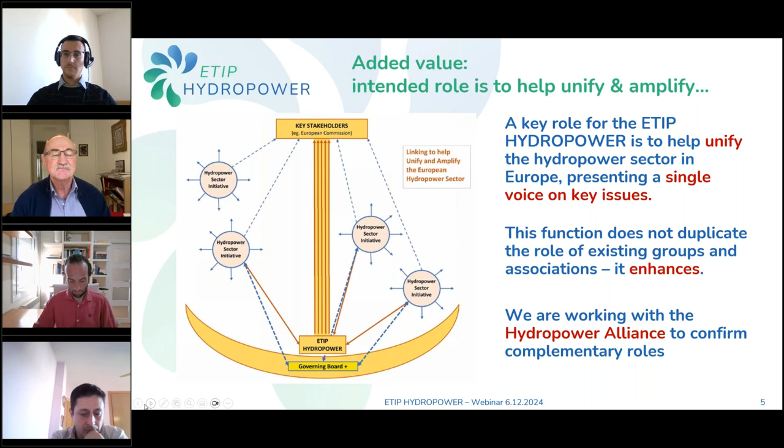Hydropower in action: we have an operational structure in place, a secretariat, and an industry-driven governance with all stakeholders from all sectors. We have a widely open scientific advisory board with 26 members. You see here the persons involved. I'm the scientific coordinator of Hydropower, and then we have the governing board chair Dennis Albrecht, and co-chairs Antonella Frigerio and Peter Stettner.

What we have done, important for those working on research projects, is establish a HERI platform which gathers all research projects ongoing in Europe, not only at the European Commission level but also what is going on in different European countries.

We have also established 4 working groups, active since early this summer: Hydropower's role for flexibility and storage, Hydropower and biodiversity, Hydropower and climate change, and a cross-cutting working group on promotion, dissemination and uptake of past and current European research and innovation projects, which organizes these webinars. These working groups will publish first results during our Hydropower Day, on 8th of April next year in Brussels.

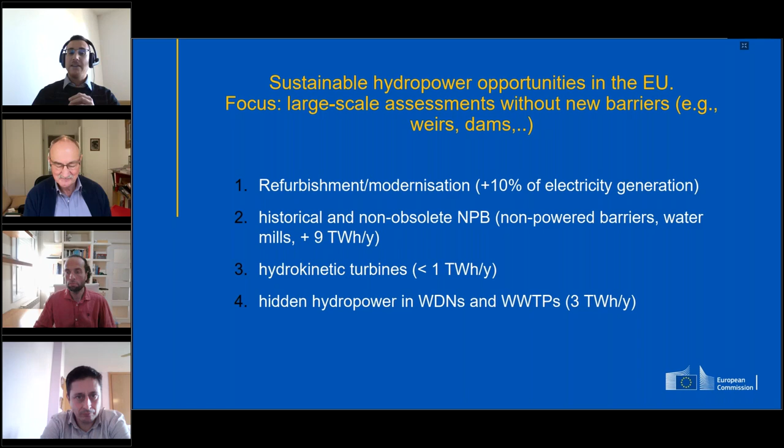Another important activity we have finished is the quantification of energy storage in hydropower reservoirs and in pump storage hydropower.

We found that in literature there are several sources of data, and often these sources provide different data. Sometimes this data on energy storage is not well defined. It's difficult to understand, for example, if they include the cascade effect or not, or if they are talking about a theoretical energy storage capacity or a technical economic one.

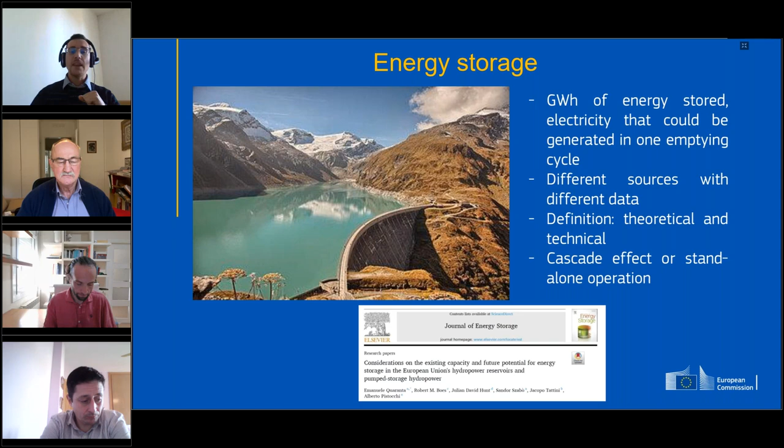So we tried to bring some order to this, and published this a few days ago in this paper. Here's a summary of our results. We provided data and calculations both for pump storage hydropower and for traditional reservoir hydropower, calculating a sort of theoretical energy storage, which is practically the head multiplied by the volume of the reservoirs.

Obviously, the smaller reservoir limits the potential. Then we corrected this theoretical energy storage potential, calculating a technical energy storage potential, considering some reduction coefficients, for example the efficiency, or the fact that not all the volume can be used for safety reasons.

And we have compared this number with the reported energy storage capacity found in literature. We found that there is agreement, but also some differences, and these differences are well discussed in the paper. Now I will not go into the details, otherwise I will need hours, but you are encouraged to read the paper and provide your feedback and constructive criticism.

It is important also to show this data because by comparing this number with the numbers provided by other studies that show the future potential, it is possible to understand really how much the future potential is. This is shown in these slides.

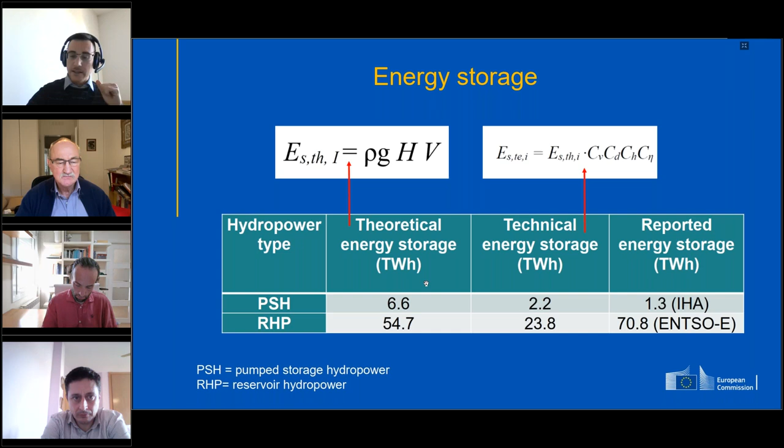You can see that the opportunities are a lot. The available potential that can be exploited, the sum of all these strategies, is much larger than what we have. So technically speaking, in the European Union, there is still potential for new pump storage hydropower.

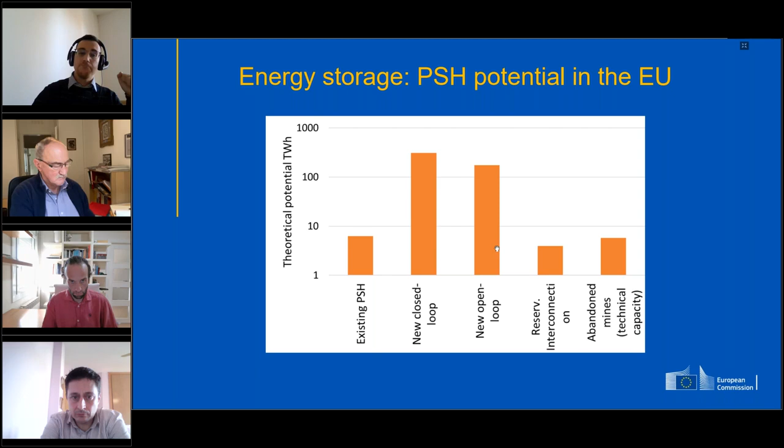For example, from new closed loop pump storage or from new open loop, but also by interconnecting reservoirs or by using abandoned mines. The problem is that most of this potential currently is not economic because of market limitations, but there is a potential.

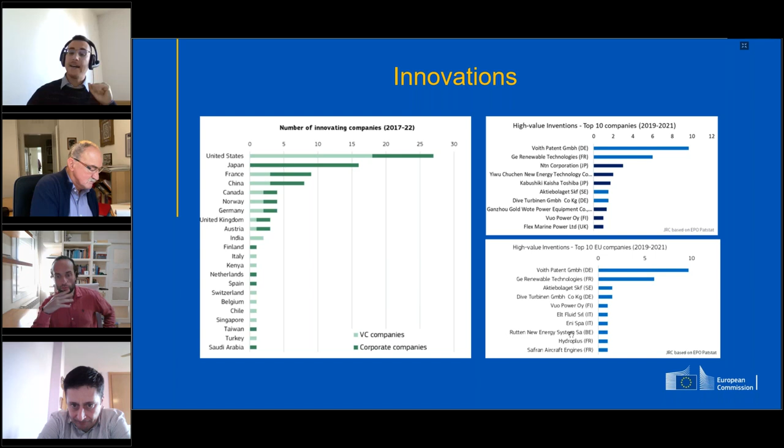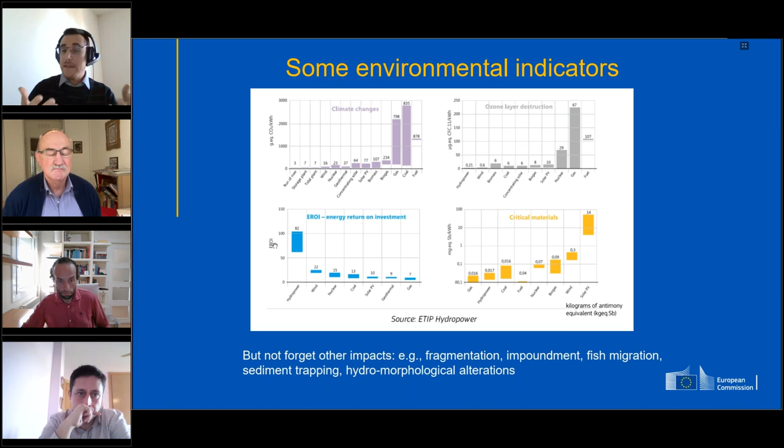If we look, for example, at the greenhouse gas emissions per kilowatt hour, or at the chlorofluorocarbon emissions, or at the energy return on investment, and so on, we can see that hydropower has the best indicators. However, we must not forget that there are also impacts associated with hydropower that are not captured by this picture, like, for example, sedimentation, fish migration, and so on. So it is very important to implement mitigation measures.

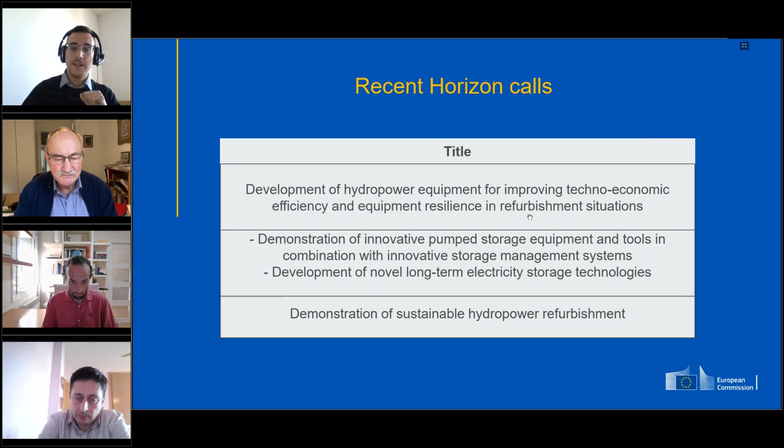Also another call on demonstration for sustainable hydropower refurbishment. So now I come to the core of this webinar, the presentation of these 3 new funded Horizon projects: RevHydro on revolutionary refurbishment for efficient and eco-friendly hydropower, Sherpa on a new solution for hydropower plants to enhance operational range performance and improve environmental impact, and StorHy, innovative storage technology and operation in hydropower. As you can see, the topics of these projects align well with all the discussion and data I showed you about the European Union.

So innovation, energy storage, and also reduction of environmental impact. Here are the references: the first is the annual report that was published a few days ago, and the second is the paper on energy storage. Maybe I can also write it in the chat. So thank you very much. Now I give the floor to Anton, who will present the next speaker. Thank you.

Thank you very much, Emanuele, for this very interesting presentation on the potential and strength of hydropower in Europe, which has been proven by the studies you have done. So we are pleased to come to the presentation of the first project, which will be done by Ademir Suarez. Ademir Suarez is currently head of the electromechanical engineering team of the hydropower generation division of Iberdrola in Spain. Please, Ademir.

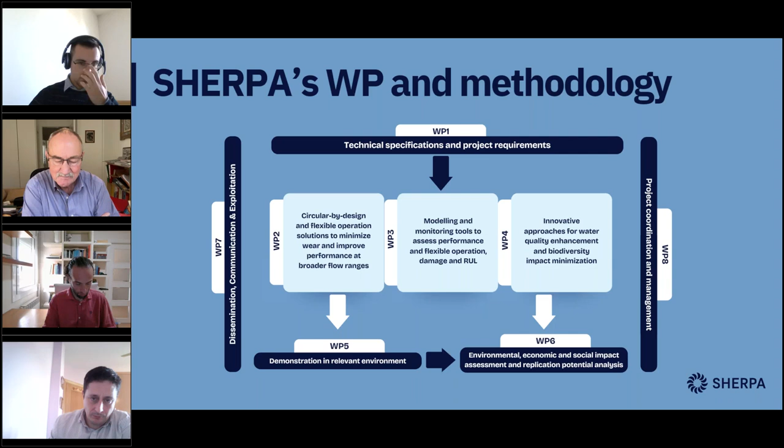Now we are going through some of the pilot plants. Iberdrola Hydropower, as operator of almost 12,000 megawatts in Spain and Portugal, is going to use our own stations. We have selected some stations with real needs from the Mediterranean basin and the Sil basin, and maybe some others that are now under assessment. I would like to show some of them with some nice pictures of these stations.

For this station, we are looking at the main objectives of this topic: operating the units in really deep part-load without any significant troubles. For some of them, we are going to assess changing to new hydraulics or applying additive manufacturing.

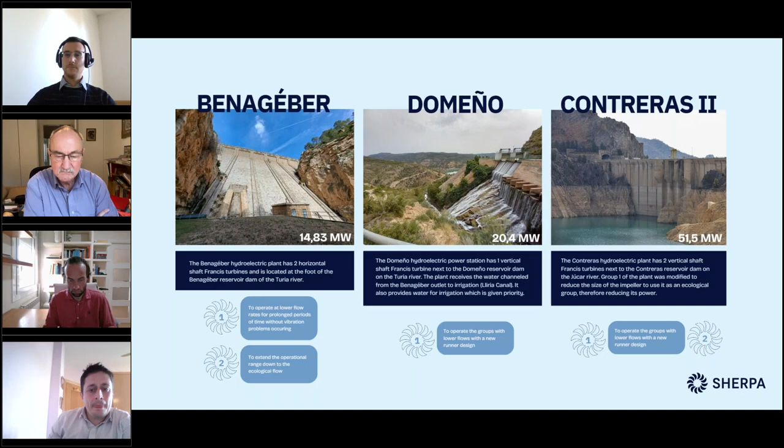More places - we are now in the first working package; we are at the stage of defining the requirements and discussing with all the partners of the consortium to know where it makes sense to apply each objective. So we are going to go through all of them, making a comprehensive and full assessment, and afterwards putting the efforts into all or at least some of them.

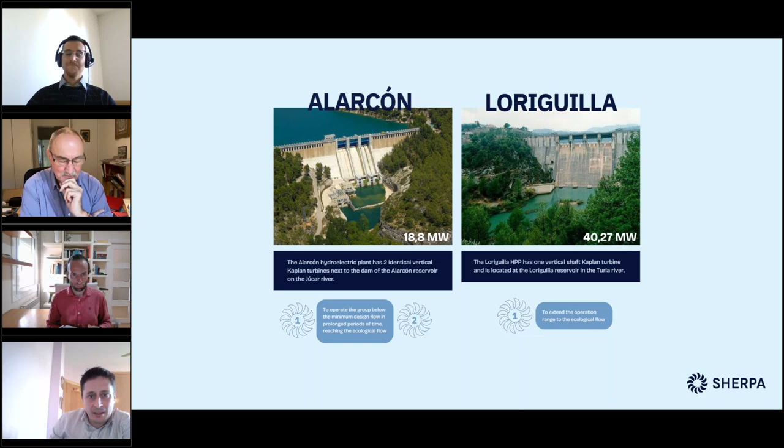Moving quickly to the Sil basin, here are some stations, and I would like to point out that some needs don't always come from all the stations. Here we have, for instance, Alto Támega, one of the newest stations from Iberdrola, commissioned almost this or last year. This station is used to launch reversible units from Gouvães.

And for instance, Daivões also is a new station, has 3 units. The 2 main units are big ones, and we have a third for the ecological flow. But here, for instance, it will be really interesting to deal with the deep part load of one of the main units, to cover the distance between the rated output of the small one for the ecological flow till the big units.

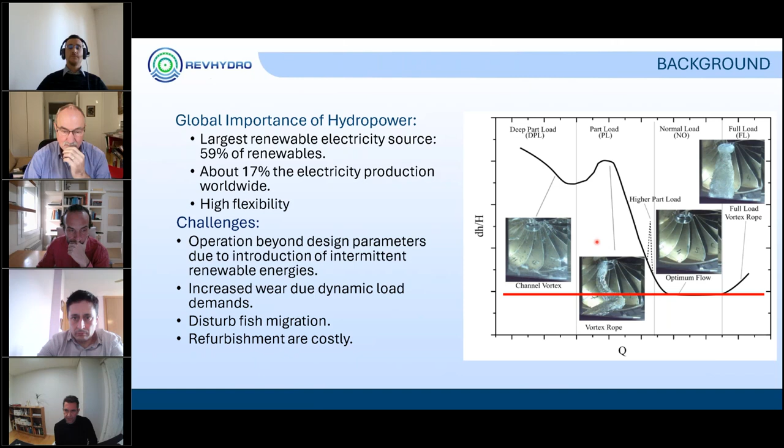So in order to achieve this type of goal, we have three specific objectives in the project: the development of some flow control technology, some fish barrier technology, and some circular economy approach.

In terms of flow control technology, we have two technologies which will be developed. The first one is in the draft tube, which consists of some guide vanes that can be radially adjusted to mitigate the pressure pulsation at part load operation due to the rotating vortex rope, and which also have some variable porosity.

The second flow control technology consists of a smart add-on, which will be installed on the runner in order to decrease the interblade vortices and the fatigue. There is already some work done in this area, but what's going to be presented is quite new.

In terms of fish barrier technology, a fish barrier will be developed—it will not be this one. The fish barrier technology which will be developed will consist of a bubble curtain, an acoustic source, and a strobe light source. These three components will be adjusted depending on the fish species, the maturity of the fish, and the environmental conditions, so we will have an adaptive system.

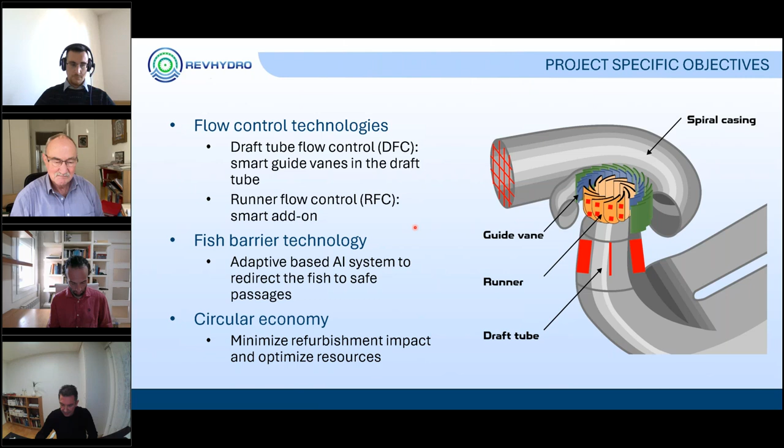In terms of circular economy, we aim to minimize the refurbishment impact and optimize the resources. To this aim, we will develop a generic methodology to study and optimize refurbishment procedures. We will perform life cycle analysis, life cycle inventory, and life cycle costing studies, and a systematic approach for maintaining and extending the lifespan of critical hydropower equipment will also be developed.

So if we look at the structure of the project, we have 6 work packages. We have the standard work package for management, and WP5 for communication, dissemination, and exploitation. Related to the specific objectives, we have one work package dealing with the development of the runner flow control, where we will have experimental investigation and numerical simulation with focus on deep part load operation.

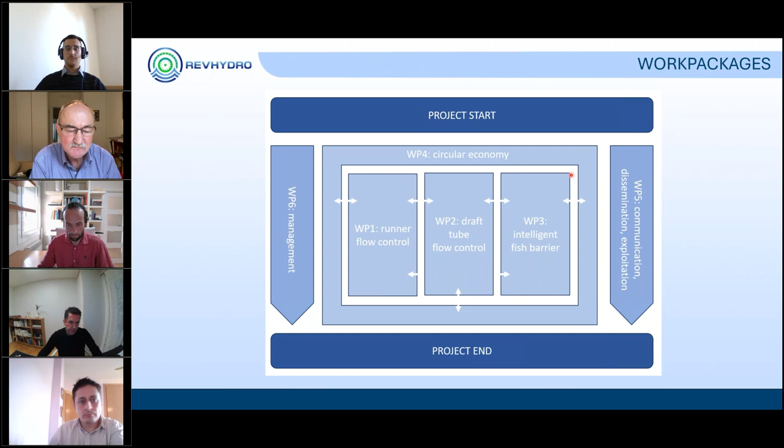While in WP2, it will be the development of the draft tube flow control, with experimental investigation on model scale and numerical simulation to develop the flow control device with focus on part load operation. In WP3, the intelligent fish barrier, or iFish, will be developed, with extensive experimental investigation using some living fish.

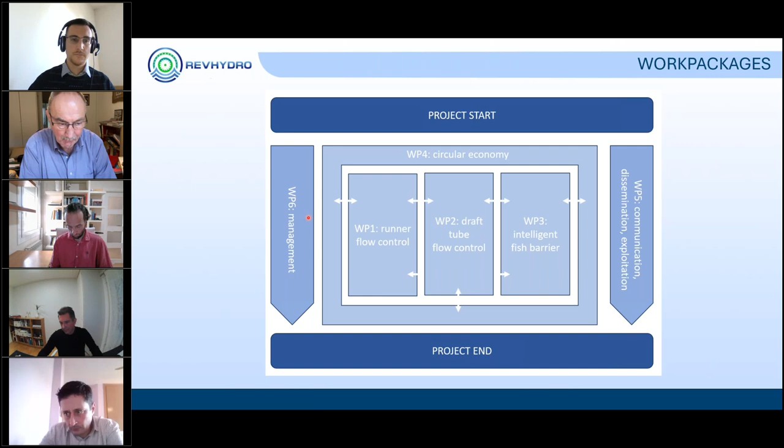Finally, we have work package 4, related to circular economy, which will be led by RSIM. WP1 will be led by General Electric, WP2 by Luleå University of Technology, WP3 by ICPE, WP5 also by RSIM, and WP6 management is LTU, which is coordinating the project. In terms of workforce, we have a total of 430 person months.

The extension of the operating range of Francis turbines and efficiency is a quite important topic in the project, because WP1 dealing with runner flow control stands for 30%, and WP2 dealing with draft tube flow control also stands for nearly 30%. Together, extension of operating range and efficiency stand for about 60% of the workforce. Development of the iFish stands for about 15%, circular economy a little less than 10%, and WP5 and WP6, dealing with dissemination and management, stand for a little less than 20%.

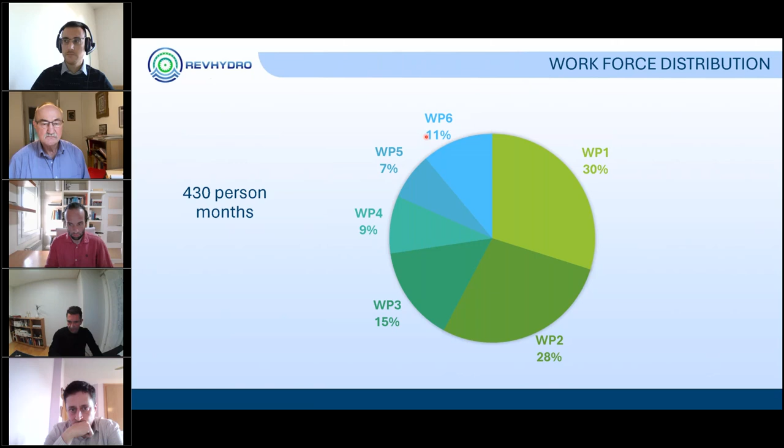In order to track the progress of the project and align all the partners, specific key performance indicators have been developed. For WP1 and WP2, we expect to predict the pressure fluctuation and strain from the numerical model within plus minus 20% of the experimental results. We also expect to predict fatigue within plus minus 20% of the experimental measurement. This modeling is quite important to develop the runner flow control device and draft tube flow control device, also for optimization purposes.

In terms of efficiency and resilience, we aim to expand the operating range by 50% with a flow control device that will be developed, and decrease fatigue by 80% at part load and deep part load operation. This will allow us to extend the turbine life by 25%. Quite important also is to allow an increase by one order of magnitude of the starts and stops without additional fatigue.

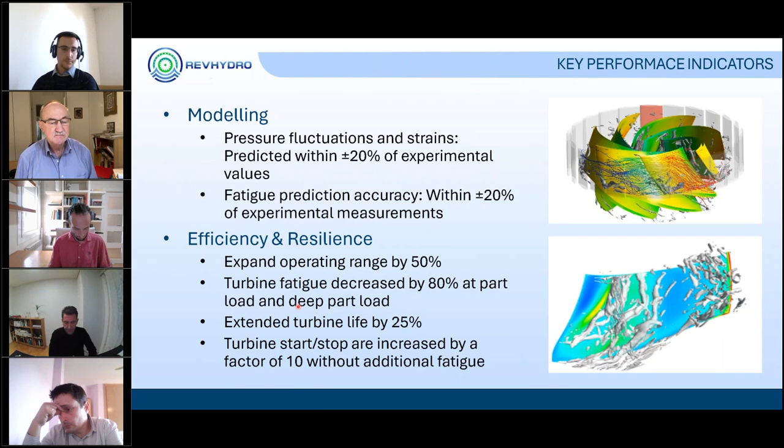In terms of key performance indicators for environmental impact, we have some ambitious KPIs. We expect to be able to redirect 95% of the fish from the turbine intake with the iFish system. In terms of circular economy, for refurbishment, we aim to decrease carbon dioxide emissions by 30%, reduce resource consumption by 25%, reduce operating expenses by 20%, and CapEx by 50%.

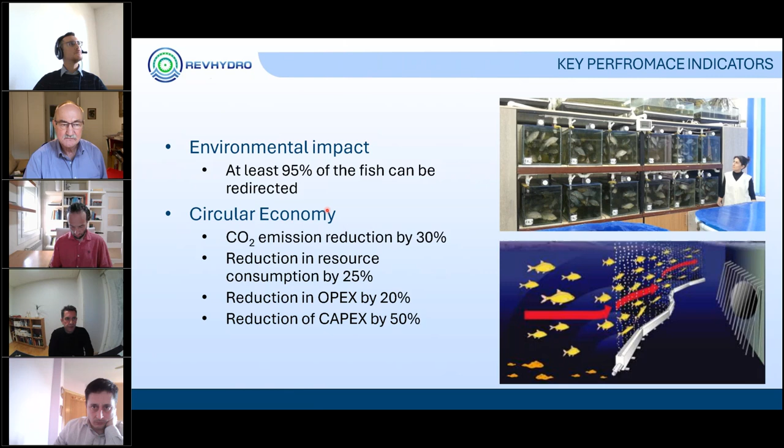So expected impact: we expect to increase energy efficiency. By reducing harmful off-design operation, the refurbishment will improve energy production efficiency by up to 10% in certain operating conditions. I think this number is quite conservative if the flow control devices work as we're expecting. We will extend the operational range and lifespan of the turbine, so the refurbishment will expand the operational range of turbines by 50% and increase lifespan by 25%, reducing the frequency and cost of overhauls.

As mentioned, we will also enhance biodiversity protection with the iFish, which aims to redirect up to 95% of the fish away from the turbine intake. And after that, we will lower costs for refurbishment through circular economy methodology.

Okay, so thank you for the introduction, and I'm going to start by presenting the project STOR-HY.

I will speak first a little bit about the call, because we believe the call had some particularities. It's about pumped storage, basically. I want to explain the reason of the proposal and the reason of some demonstrators that we took. We'll present the consortium story, the outcomes, and then the expected impacts and the strategy. First of all, if we look at the goal we were targeting with this project, there were some keywords which I put here to summarize. One of them was increased availability of pumped storage, reduced OPEX and CAPEX in operations, improved efficiency. Also, Manuel has shown his report about how European industry is very competitive in hydropower. It's important to maintain that competitiveness, and finally, the sustainability of the innovative technologies. That somehow summarizes some important aspects of the call.

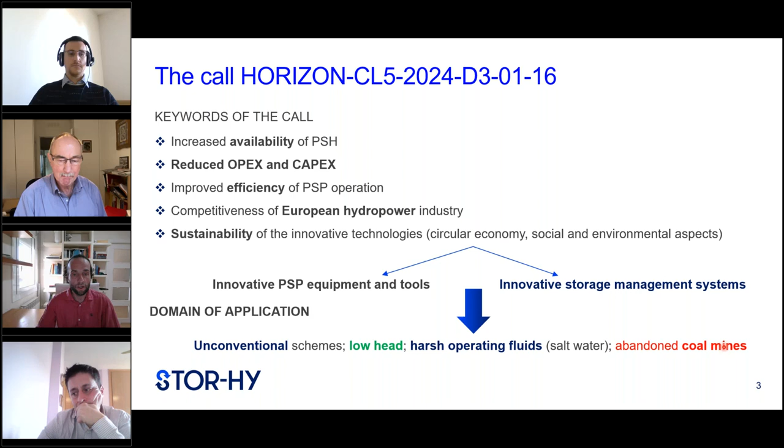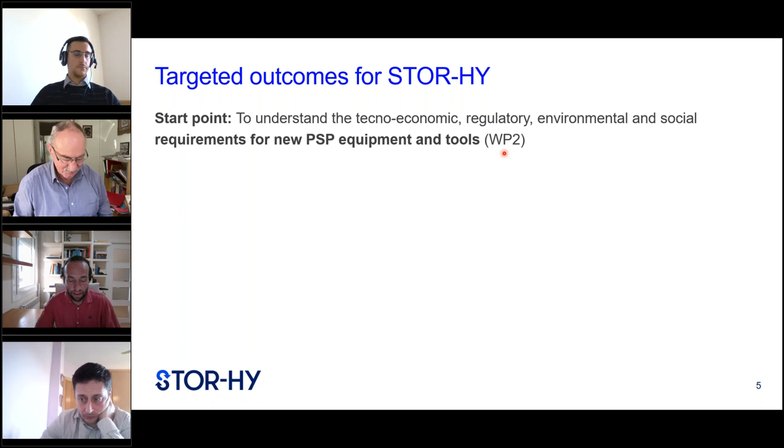When targeting the outcomes for our project STOR-HY, the first thing is to understand, from the techno-economic, regulatory and environmental point of view, what the requirements would be for new pumped storage equipment and tools. This will be a dedicated part of our work, the second work package. Later I will present the work package structure.

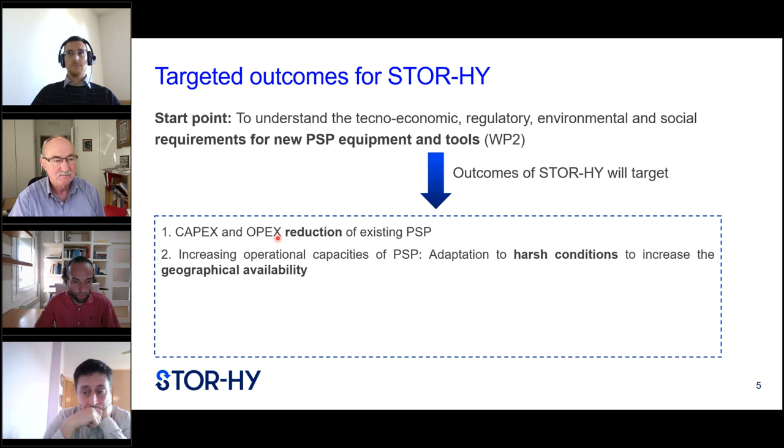Based on this previous analysis, which has already started, some things we will target are CAPEX and OPEX reduction of existing pumped storage hydro plants, and increasing operational capacity of pumped storage is also very important, because we believe one direction we should move is to adapt pumped storage to harsh conditions—for example, saltwater could be one direction. This will also allow us to increase geographical availability of pumped storage in the future, and to improve digital operational tools. We will have a package dedicated to digitalization of hydropower. Also, from the existing pumped storage plants we already have, we will propose ideas to boost and improve the site utility with low CAPEX cost. Finally, it's important to keep in mind that the things we are developing in STOR-HY, we want to be ambitious.

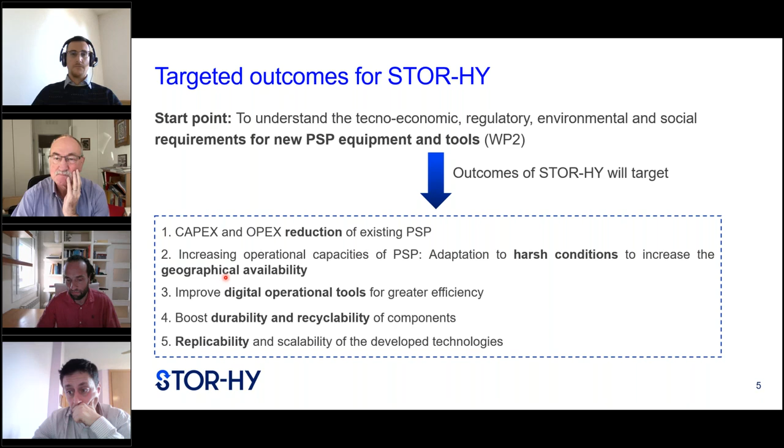We want these technologies to be replicable and scalable to other demonstrators and other sites, not only in the sites where they will be tested.

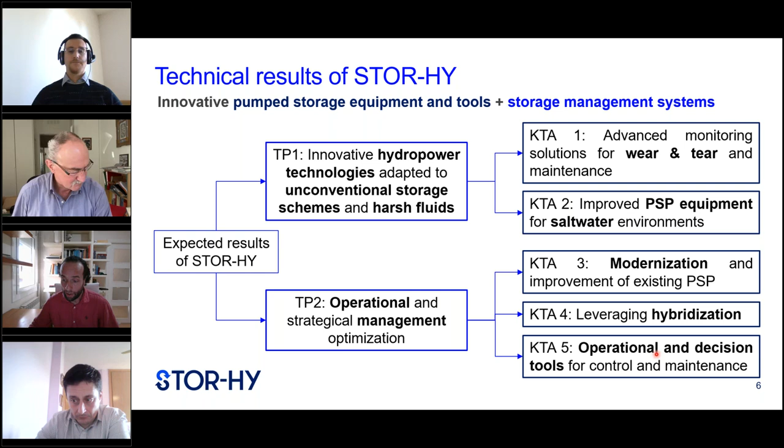For example, here we have wear and tear monitoring and evaluation, improved PSP equipment for saltwater. In this technological pillar of operational and strategical management, we have the modernization and improvement of existing PSP. We will also have demonstrators hybridized with battery and solar panels, so how to optimize this, or how to leverage hybridization to improve the operation of these sites, and finally to develop operational and decision tools for control and maintenance. So basically this is an overview of the 16 technical results, and as I said, they are all classified in one of these two technological pillars and in one of the key technological areas.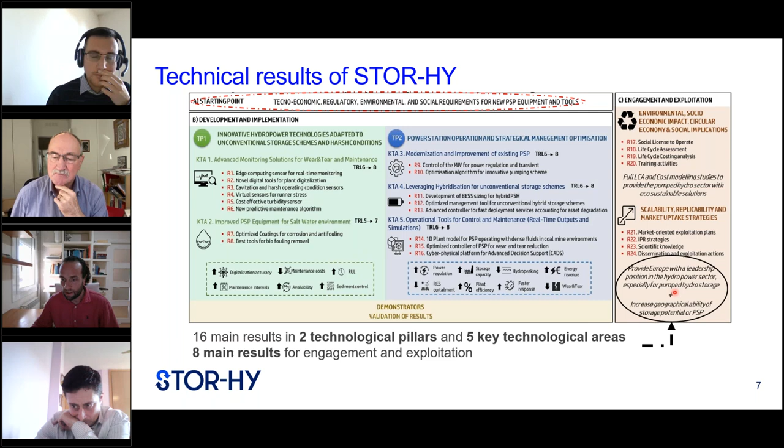Besides these technical results, we have some ways to quantify the engagement and exploitation of the project. These results are defined here. The structure of STOR-HY, as my colleagues from other projects, Michel Cervantes and Ademir, have shown in their respective projects - we have a similar approach, which is typical in this type of project, with project management and communication and engagement as a transversal thing. But here I will comment on the particularities of our project.

We will start with techno-economical and environmental, social requirements. This work package will have a lot of activity at the beginning. This would be somehow the technical core of this project, one work package dedicated to digitalization, to develop digital tools that allow informed decisions and improve control. This is something addressed in this work package.

Here on this side, we have improved technological equipment for harsh operating fluids, particularly saltwater, because we will have one demonstrator which uses saltwater, as I will show later. And then, of course, as this project is a TRL 7/8 project, we need to test and validate the technologies we are developing in a relevant environment, in real demonstrators. So we have a lot of activities which will be tested and validated here in the demonstrators.

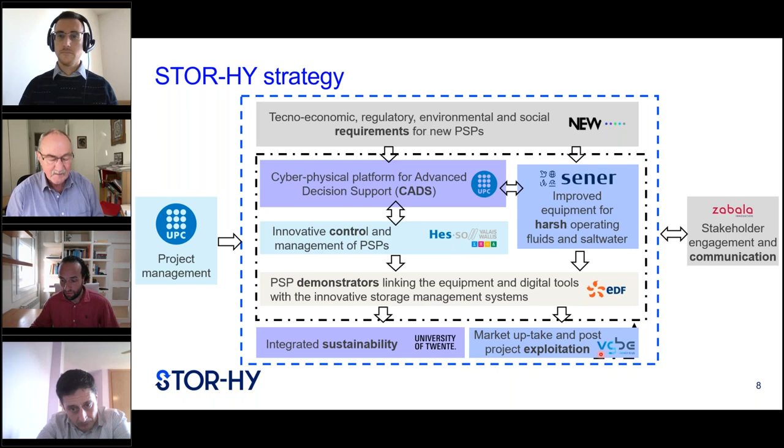We also have one work package dedicated to sustainability. For that, we have, for example, University of Twente, experts on that type of evaluation. And we have the exploitation of the project led by VGBE.

So a little bit more into detail into the core technical part - this is more or less how our approach will be. We will have the demonstrators. Our project is centered on the data, on the real operation of demonstrators. With the demonstrators, we can gain data, but it's important to understand which data is relevant for our purposes, how to monitor this data, which signals are important to monitor, how to digitalize hydropower. At the end, this is one key aspect.

Then once we go through this monitoring phase, the next part is what to do with this data, and this is a big part of the work here. We will use classic approaches such as CFD and FEM tools, although, as Michel Cervantes has shown, it's very challenging to simulate some types of conditions. We want to develop sediment transport models, the concept of virtual sensors, for example for predicting stress and strain in the turbine, based on AI techniques. Based on this modeling, we want to develop meaningful condition indicators that will support and improve the operation of the pumped storage plants.

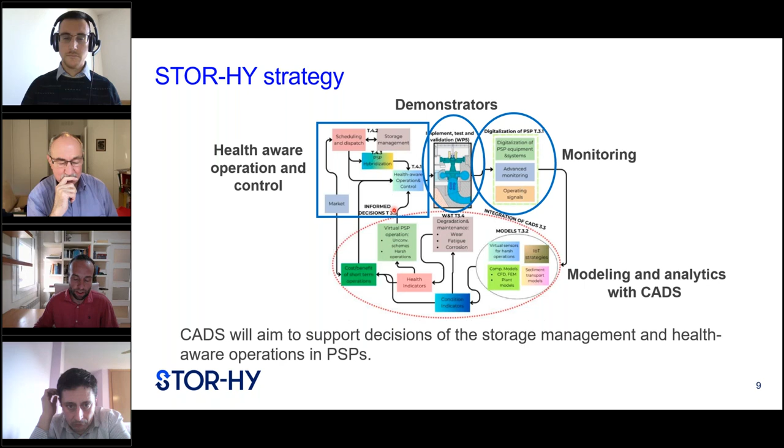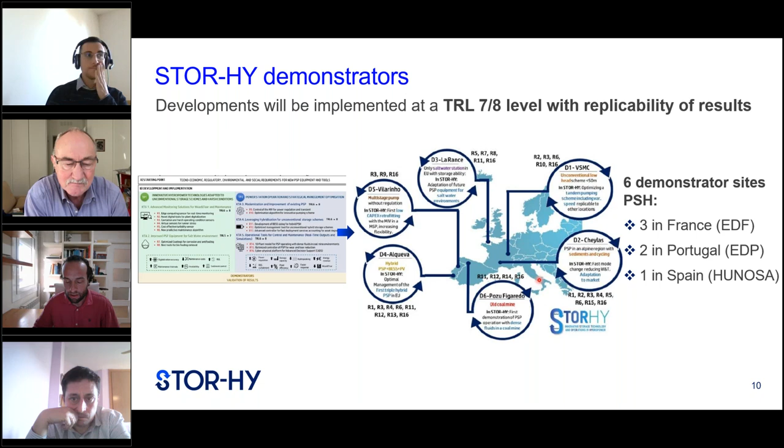Now I will speak about the demonstrators. We have 6 demonstrators in this project, 6 PSH sites: 3 in France, 2 in Portugal, 1 in Spain. I will go into detail in the next slide, but what I wanted to show here is that we previously defined results, and here we are explaining where these results will be addressed or tested. We wanted to have some replicability of results, so if we develop an important result, we want to test it in more than one site with different characteristics, which makes things more valid.

Looking at the demonstrators, as required in the call, we should address unconventional storage schemes and/or harsh operating fluids. And these are our demonstrators.

3 of them are in France, provided by EDF. The first one is Vouglans-Saut Mortier-Coiselet, a cascade of 3 reservoirs. It's a little hard to see, but you can see these 3 levels, these 3 reservoirs. What will be done here is how to optimize the management of water and energy of this cascade system, because EDF will install a new turbine between the Vouglans reservoir, which is the top one, and the Saut Mortier.

The other one is Cheylas. It's a more classical scheme, very close to Grenoble, 250 meters, 250 megawatts. Here what we are addressing is harsh operating conditions, because we want to increase the number of starts and stops to be more available and responsive to the market, and also address the topic of sediments, because in some situations these areas can have problems with sediments in the water.

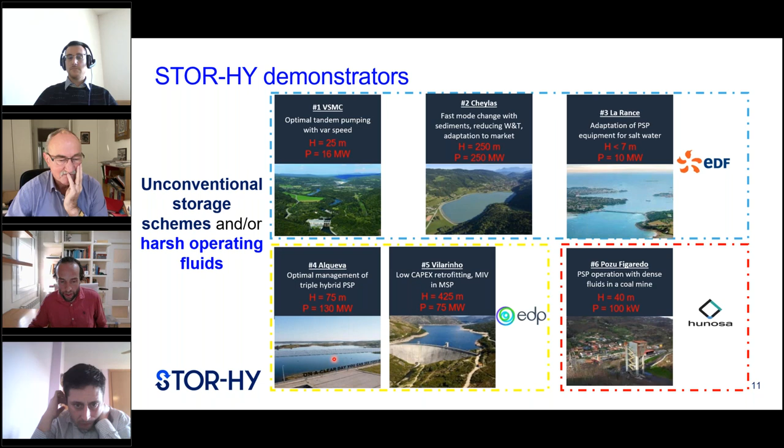In Portugal we have 2 very interesting demonstrators. One is Alqueva, maybe the only triple hybrid pumped storage scheme. By triple hybrid, I mean it's a classical pumped storage together with a battery and floating panels, as you can see in the picture. The main idea is to optimize these 3 systems together to maximize the potential of Alqueva.

The other one is Vilarinho, a multi-stage pump. Most multi-stage pumps were commissioned many years ago with a fixed operating point, meaning they're not able to regulate. In this case, what we want to test is a low capex retrofitting in order to regulate the power of the units working as turbines, done via the main inlet valve.

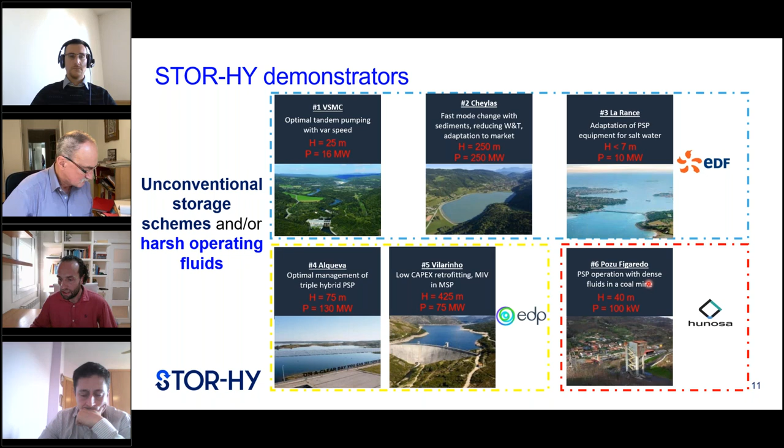Finally, a small but interesting pilot provided by HUNOSA, called Pozu Figaredo, in the north of Spain, in Asturias. Asturias used to be an area with high industry penetration of coal mines, but the direction now is to decommission coal mines. So we have places and infrastructures which could theoretically be used to develop new pumped storage places. Here it will be a small pilot, 100 kilowatts, but in a relevant environment, an abandoned coal mine, where we want to test pumping with dense fluid.

This is the last slide. Wrapping up, STOR-HY has already started, like the rest of the projects we've seen today. It will last 4 years, from 2024 to 2028. We are a consortium of 21 organizations, and we target the reduction of CapEx and OpEx to boost durability and recyclability of components, digitalization and improved digital tools for better operation and greater efficiency, and ultimately increasing operational capacities and geographical capabilities of pumped storage.

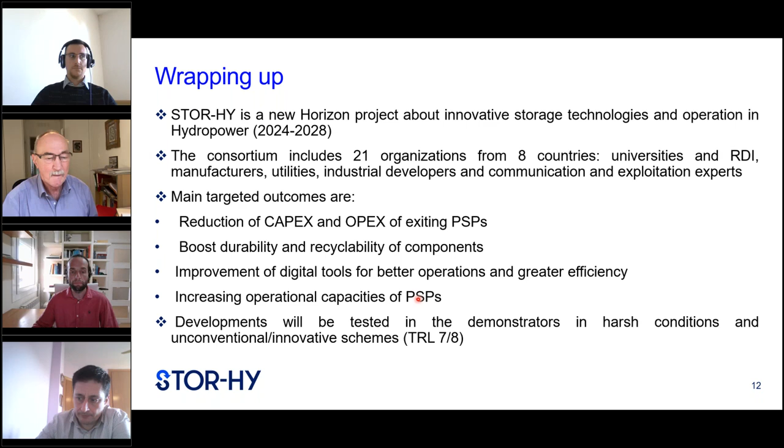Thank you very much, Alexander, for this very nice presentation. I'm really impressed about the very large consortium you have. Almost everybody in Europe is involved in a way in that project. I think that will be also very promising for the results. You have already certain results, but we are also looking forward, perhaps next year or the year after, to get more information about what you have already achieved. Thank you very much for this presentation.